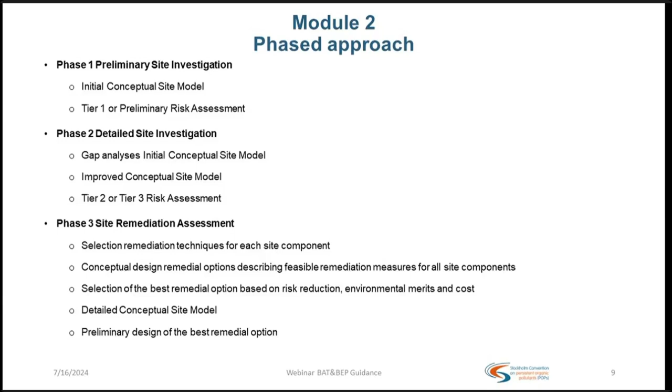When you have selected the best remedial options, you enter the remediation management phase 4. In this phase, the contractor should detail the design of the remediation so that it can be implemented. The other deliverables of this phase are eliminated acute risk, contained remaining risk, and an updated conceptual site model, because remediation changes the situation on site and you have to record that. We use the conceptual site model to keep track of the changes on your site. Often the remediation is completed but there are still remaining risks, which should be managed properly, and therefore you enter phase 5, called site monitoring and aftercare.

And the site monitoring and aftercare, of course, gives results of the monitoring. You keep track of the changes, for instance, the reduction of the concentration in the plume, and this information is also, again, used to update your conceptual site model on a regular basis.

These are the 5 phases, and for each phase, it is necessary to appoint a responsible party, to contract the accountable party, and to establish the parties that should be informed on the progress of this management of sites.

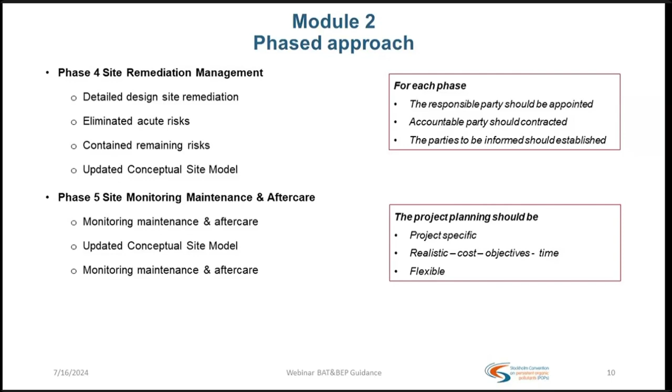And the project planning of this whole, let's say, phased approach should be project specific, realistic in cost, time, and objectives. And you should work with a flexible work plan, because often you come across unexpected things in soil and groundwater and you have to deal with that. So please, if you start doing this and you plan your project, you should have some flexibility in time and cost. So budget. Please, can I have the next slide?

Module 3. Module 3 is devoted to the site investigation, assessment, and conceptual site model. And this module first introduces phase 1, the preliminary site investigation. It gives the objective and task, and then it deals with the different tasks in detail. So the desktop study, what do you have to do for the desktop study?

The site visit, what has to be done on the site, photo reports, interviews with all kinds of stakeholders. Then a site reconnaissance survey, meaning that you want to reveal the most prominent aspects of a site. And then with all the information collected, you construct an initial conceptual site model. This section ends with the format of reporting of the phase 1 results.

Then the next section is the same for the detailed site investigation. So we start with the objective and the task, and then we explain the task, gap analysis, the bridge between phase 1 and phase 2, field investigation, the installation of boreholes, the installation of monitoring wells, and then the data interpretation and evaluation.

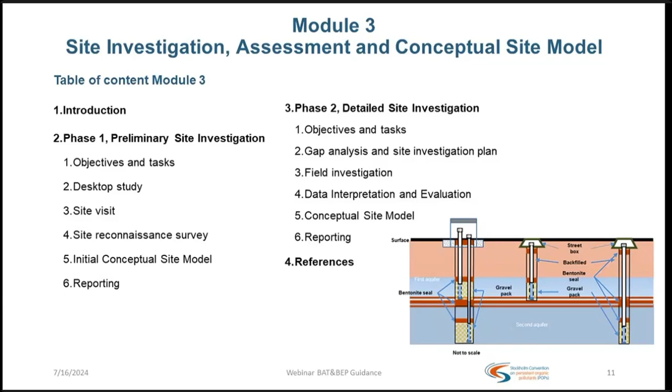Here on this slide, I have summarized the strategy of a preliminary site investigation. It starts with collecting as much as possible already available site information. And these are site visit reports, site photo reports, survey reports, and archives. And of course, nowadays you can easily collect site images from the satellite, which is a great help in getting the first ideas of the situation on site.

With all the information, you construct your initial conceptual site model, and an initial conceptual site model is complete when you have identified the potential source. In this case, it's very obvious, it's dumped material. Then the source receptor pathways, here indicated with the red arrow for the wind and the blue arrows for the infiltration and the groundwater flow. And then last but not least, the potential receptors, here on this small graph indicated with the green arrows.

The information of the initial conceptual site model can be used to carry out a tier 1 risk assessment. In module 3, we do not, let's say, go into details of the risk assessment. We have devoted the next module, module 4, to the risk assessment, because it's an important aspect of the risk-based approach of this contaminated site management. But the deliverables of phase 1 are the input for phase 2.

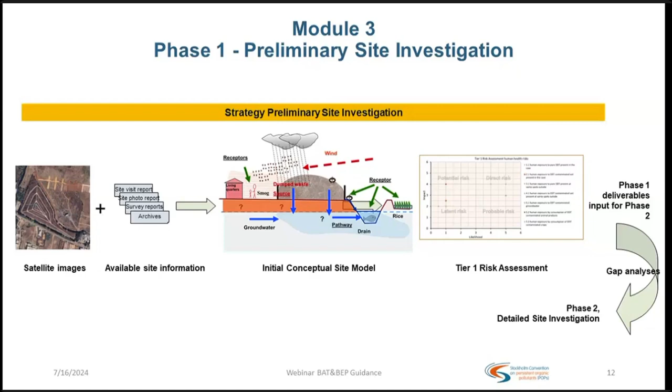And on the next slide, I have done the same for phase 2, the strategy for phase 2, the detailed site investigation. Can I have the next slide? So here is the strategy for the detailed site investigation. The input are the deliverables of phase 1. And to bridge phase 1 and phase 2, you carry out a gap analysis of the initial conceptual site model.

With that information, you construct a sampling and analysis plan, in this picture indicated with the small stars on the satellite images. To carry out a site investigation, you need in some countries permits, but of course you need to know the cost of the investigation. A quality control and quality assurance plan has to be made, and a health and safety plan for the field survey has to be made before you go to the field.

Nowadays, remote sensing recording using a drone is very easy and very cheap and gives you a very accurate actual site location map. And with that remote sensing image, you can go to the field and use it as a site location map to record on that map all your field observations.

And the field observations are sampling of the soil, installing boreholes and taking samples, installing groundwater wells and taking groundwater samples, taking sediment samples, and so on. These samples are packed preferably in containers provided by the lab, then under a cold chain, especially for volatile components.

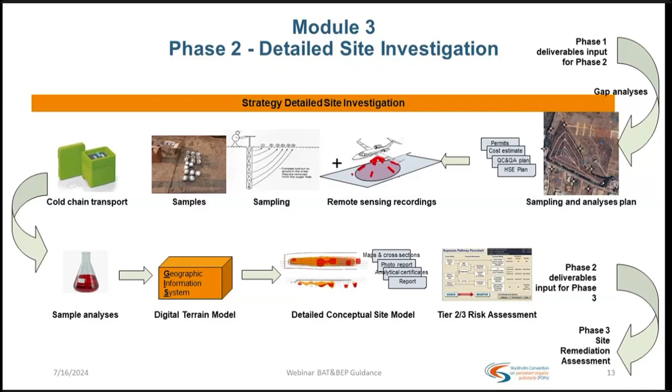I told you that we have devoted module 4 especially to the environmental risk assessment. We recognize 3 types of risk assessment. The first one is a tier 1, then tier 2, and then the tier 3 risk assessment. In section 2 of this module, it's explained what and when to use these different tiers. And then the last subsection of this is what is needed to perform these different risk assessments.

And section 3 is used to explain in detail what a tier 1 risk assessment is, the methods and the results, how they are reported. Section 4 of module 4 is the same for tier 2 risk assessment. You need to have the improved conceptual site model, the methods, and how to present the results. And then we come to the tier 3 risk assessment.

When a tier 3 risk assessment is needed, the detailed conceptual site model needed for the information storage, the use of tier 3 risk assessment models. Then often you need contact sampling, that's discussed, and then advanced research methods for assessing adverse human effects is also addressed. And then of course the last is the tier 3 ecological risk assessment. All in one module for better understanding the differences. Can I have the next slide, please?

Risks with a low impact and a low likelihood are called latent risks. And last, risks with an impact which is low and a likelihood which is high are called probable risks. The way to report is on an Excel file. Can you show me the Excel file? Okay, thank you very much. Here, this is also given in the module.

On the left-hand side, on the top is a diagram, and there you put all your risks identified with the help of an initial conceptual site model. You give them a number, and then you can assess the risk for human exposure, for ecological, and for transport. And you can give them a score from 1 to 6, and you multiply the likelihood and the impact, and then you add the risks, and then you get a risk figure.

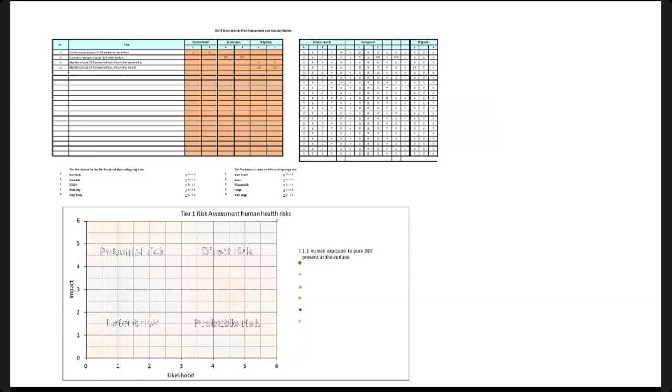This risk figure can be used to compare the different risks at a site, but you can also add all the risks of a site, and then you can compare the sites based on risks. And this is, let's say, the essence of the risk-based approach of phase 1. Can I have the next slide?

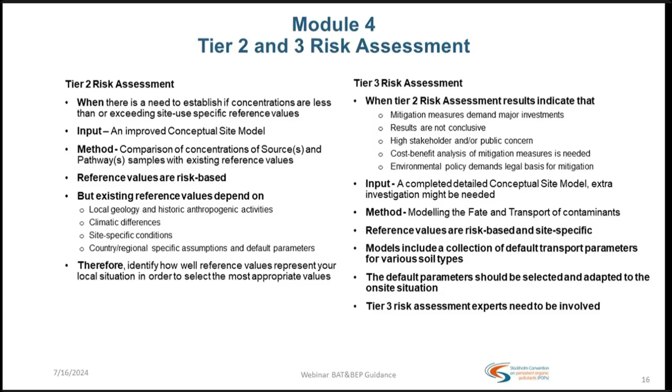Can I have the next slide? I think now I hand over to Lee.

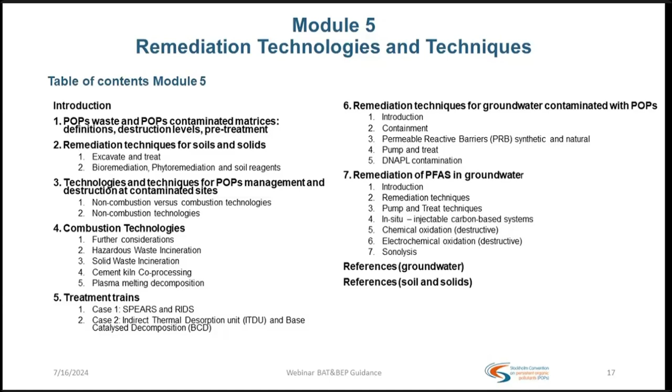Next slide, please. So Module 5 provides guidance on the available technologies and techniques for all of the matrices, whether soil, sediment, groundwater, and wastes. We also look at sustainability issues, as I mentioned, with different technologies and their potential to release further POPs in the form of emissions or releases or residues. We have dedicated a whole section to PFAS contaminated site management, and we have received some very good comments in previous rounds that have added to our knowledge on this issue, and we've incorporated those in the previous comment round, and there's some very useful information there.

Some of the technologies and techniques covered here are focused on degrading and removing POP contaminants in the environmental matrices to reduce the risk to receptors to acceptable levels. They may not necessarily destroy POPs in situ, but they can degrade them to relatively low levels. Other technologies have been assessed as capable of destroying or irreversibly transforming POP waste so that it no longer exhibits POP characteristics as required under sections of the Stockholm Convention.

And in some cases, as I mentioned, treatment trains are discussed that can increase the efficiency and sustainability of the remediation and avoid the mass disposal of soils and sediments, because certainly in times past, many sites were remediated by simply digging up the entire mass and then depositing it somewhere else, perhaps in a landfill, which just shifted a lot of the problem without actually coming to a sustainable solution to the site that was affected. So wherever possible, we look at retaining soil mass and removing the contaminants.

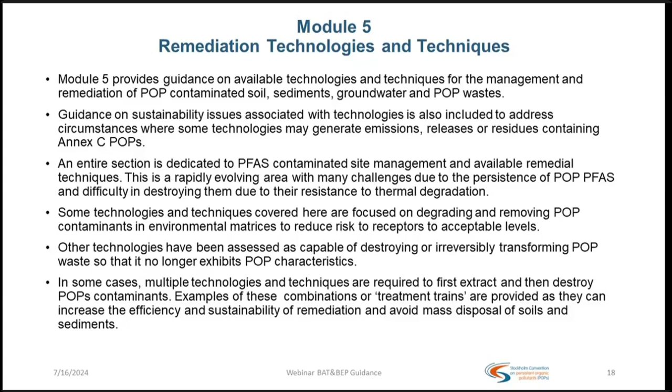Next slide, please. And at this stage, I'll hand back to Bodwin. Yes, thank you very much, Lee.

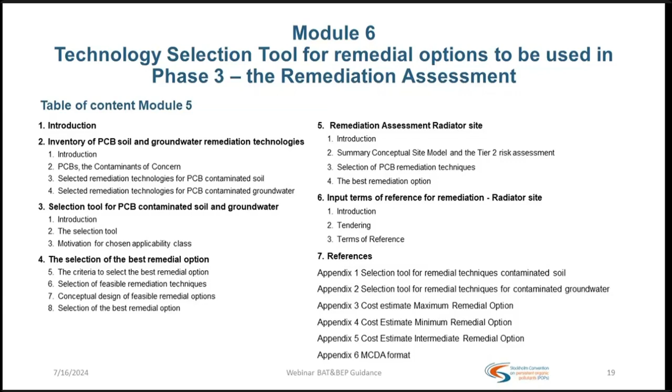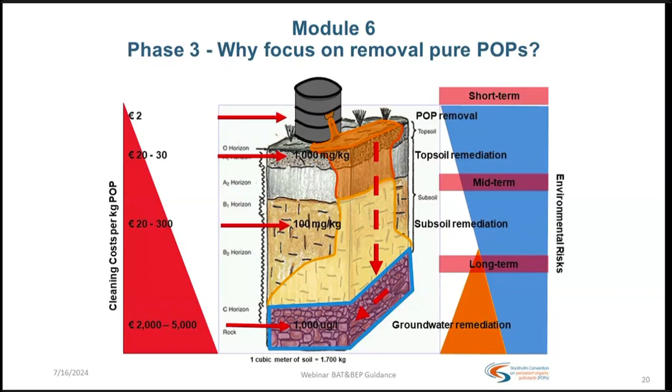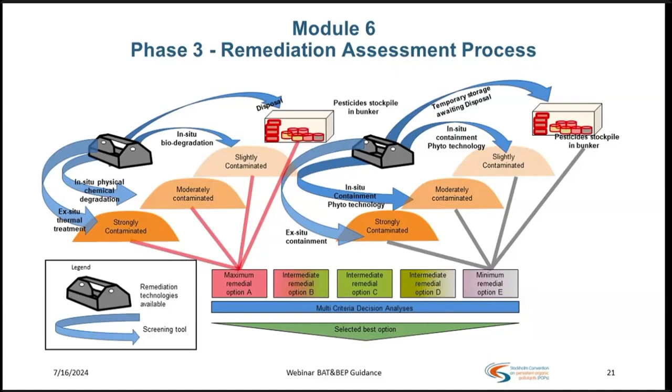Thank you, Bodwin. Module 7 looks at remediation from the standpoint of stakeholder engagement, public and worker safety and health. We provide guidance for site-specific stakeholder engagement and the different steps involved, whether it's planning, implementation, evaluation and reporting, and so on, and the duty of care and social responsibility,

because in many cases, we look at safety issues within the site that's being remediated, but not a lot of attention is paid to the surrounding community issues and their perceptions of the risk at the site, the actual risks they may encounter, and the types of mitigation measures that need to be put into place to ensure that the community is protected at least as well as the workers are protected on site.

And under Module 8, we do highlight the health and safety issues for workers on site, including the placement of workplace amenities and first aid facilities, the need for exposure monitoring and health surveillance programs, to detect whether workers' protective equipment is satisfactorily functioning, or whether they're actually exposed, potentially from sources that may not be obvious.

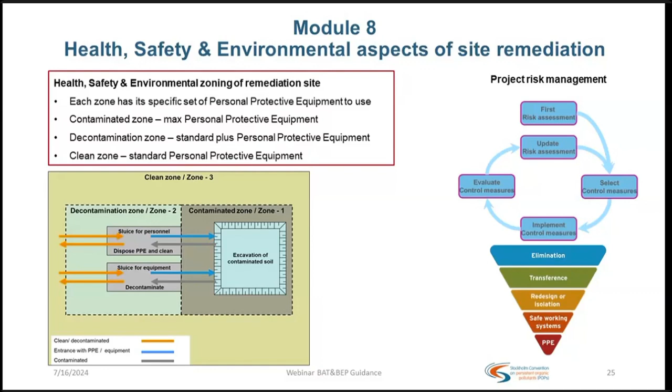Next slide, please. That's for Lee. Lee, can you walk us through the last module?

Yes, I can. Module 9, getting started on legislation, policy, inventory development, and financing remediation. The objective of this module is to draw together all of the elements once you've taken into account the previous modules, once you've understood the technical assessment necessary for remediating a contaminated site, the identification and the characterization of the site. If you're going to build a framework for contaminated site management, it's necessary to also have in place legislation and policy for POPs contaminated sites, and really for all contaminated sites in your country, but POPs are a subsection of those. It's important that contaminated sites have a legal basis and policies that discuss how they should be managed.

But just as important is developing a contaminated sites inventory. Many countries may have very rudimentary or disorganized records of contaminated sites. So organizing those into a comprehensive inventory and moving from the early stages of pre-assessment to a formalized inventory is very important. One of the reasons is that it's important to consider the relative risk between the different sites. If you don't have an inventory listing those sites, it's very difficult to go on to the other stages of identification, assessment, and characterization.

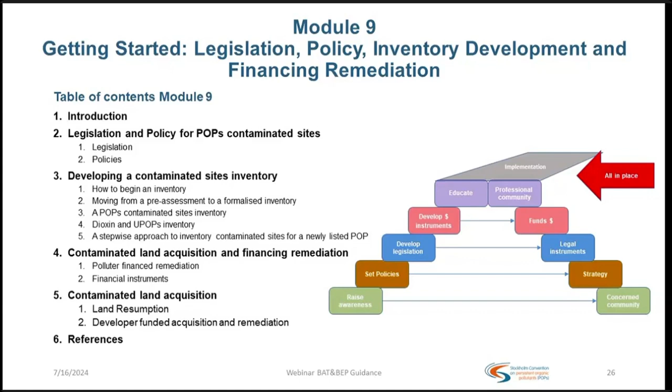And this goes back a little under module 9 in terms of site prioritization to, if you recall the chart that Bodwin introduced, looking at risk levels, where you can calculate figures for the risk related to the site, both within the site itself, and then giving a risk score that you can apply between sites.

But after you go through your stage-wise approach of preliminary investigation and risk assessment, you again can bring that down to 250 sites that are considered to be relatively higher risk. After conducting a tier 1 risk assessment, you can bring that down to 100 potential high-risk sites, and then following very detailed site investigation and a tier 2 or 3 risk assessment for sites in a selected cluster, you may arrive at 25 high-risk sites, and then with remediation of sites with confirmed high risk in selected cluster, you can perhaps drive that down to 10 sites that are top priority for your country to expend its resources on to get the process started.